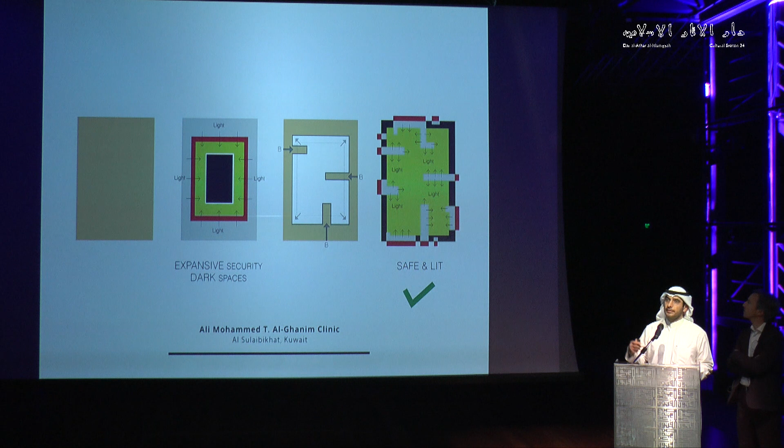In this particular project, situated in a so-called abandoned area in Sulaibikhat, we began to organize the clinic itself, which is a healthcare clinic, around Nur, around light. And we structured the spaces to circulate around the idea of how do you perceive light? How do you get closer to light? How do you begin to circulate towards the light?

As you begin to actually go around the clinic, what you begin to understand is the quality of light that you get through the various types of courtyards, and most importantly, how light itself and the different mechanisms of using light protect, but also signify the power of this healthcare institute within the site where it stands. Obviously, the issue of structuring light is very important, not only in this project, but we've begun to develop it as well in a different context.

And in this project, which we did a few years back, which is the last instance, a church in the outskirts of Seville, developed in a very impoverished area, where we had very limited resources in developing this project.

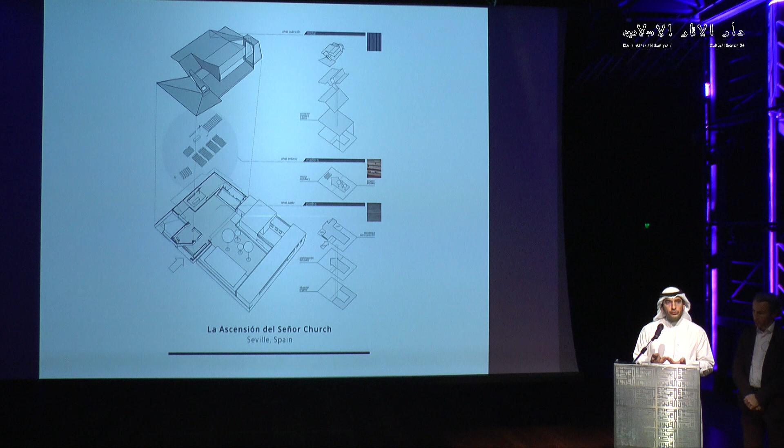There were two primary elements we looked at. One is the floor, which is like a carpet that began from the main entrance to welcome people through the project itself. The second, more important part, is actually the roof, which started to work as a means to focus light into the various areas within the church itself.

So we used Nur to structure the way people actually pray within this environment. Nur, for us, we have been playing with it to bring depth, to bring activity.

The Nirvana House is an extensive house structured through 7 courtyards, with a very extensive program but limited views into the sea, which is why the orientations were challenging. What we were confronting was the repetition of social spaces.

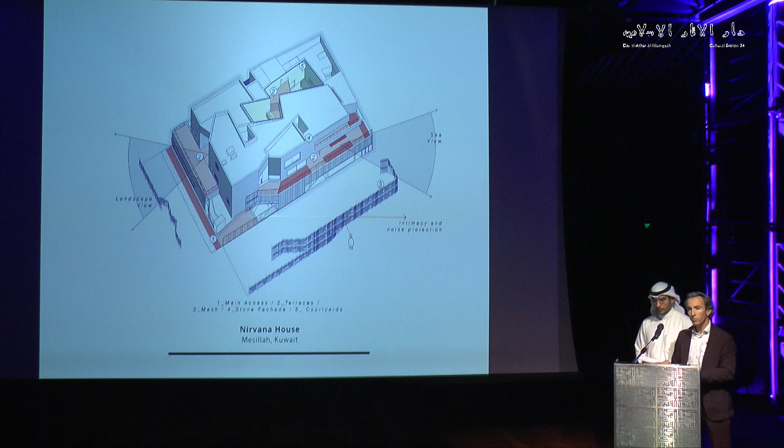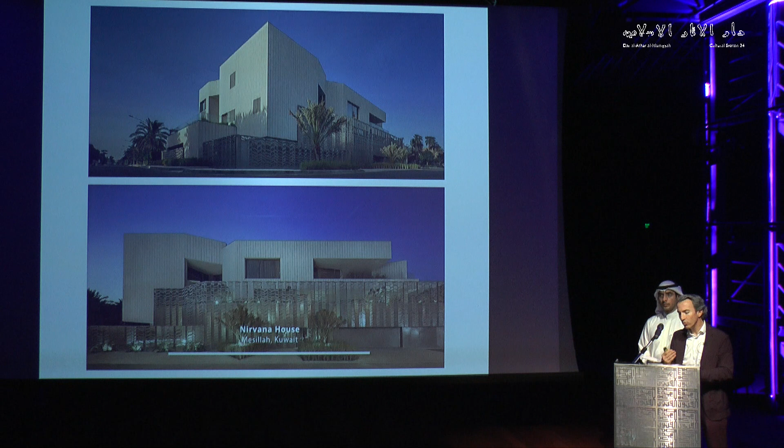And how to transform these spaces as we go, changing the materiality but also changing how you perceive the space. The space has to be read in a different way on a daily basis, but also in the way you move around. This also has a strong impact on the mashrabiya, this screen that we used.

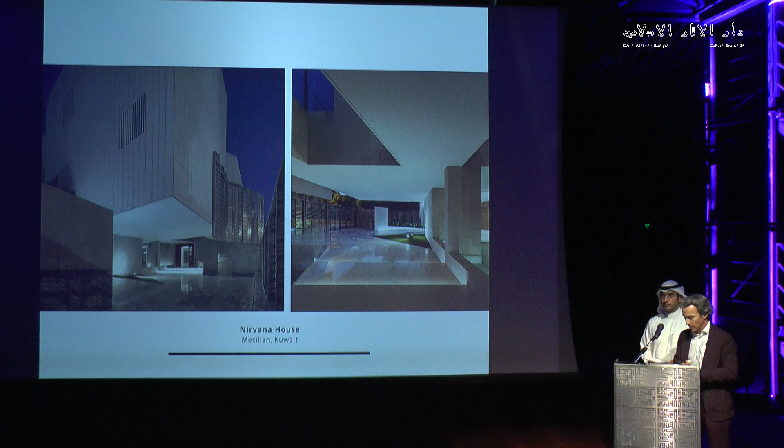You see the implication it has, how it changes completely how you could perceive the space. Instead of being a monotonous element, it becomes part of that reading, an extra reading - these layers of information that we are providing to the end user.

Also, for us, it was very important to break that relationship between interior and exterior and bring continuation between one space and the other. That reading, we could only manage to do through light, through Nur.

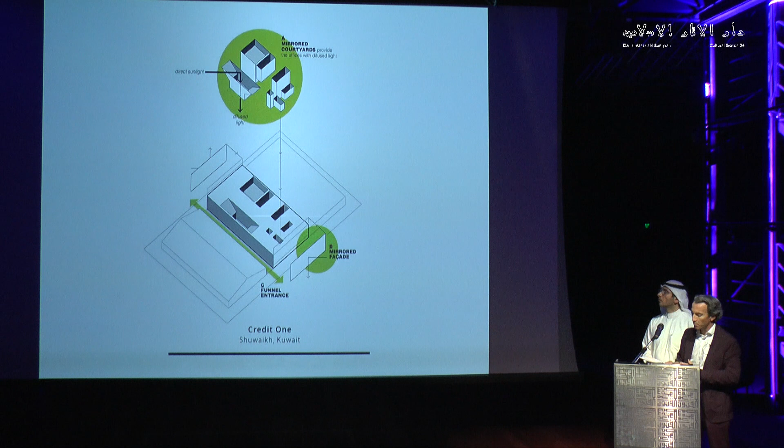Here's another example, completely different. This is Credit 1, an office for a car leasing company. In this case, we wanted to represent what the values of this company are. It's structured differently, in Shuwaikh, a very compact plot. We needed to bring some light into all the working spaces.

So we structured the project around six skylights. The issue here is we wanted to talk about cars, how that cinematographical experience when you are driving is represented on a static architectural element.

And this was why we introduced this blurry space, in a way that you don't really perceive what the space is, but you only feel - you have an experience of what is going on.

So there are small flashes of a sequence of things, and we considered that very important, to bring that aspect of what a car is.

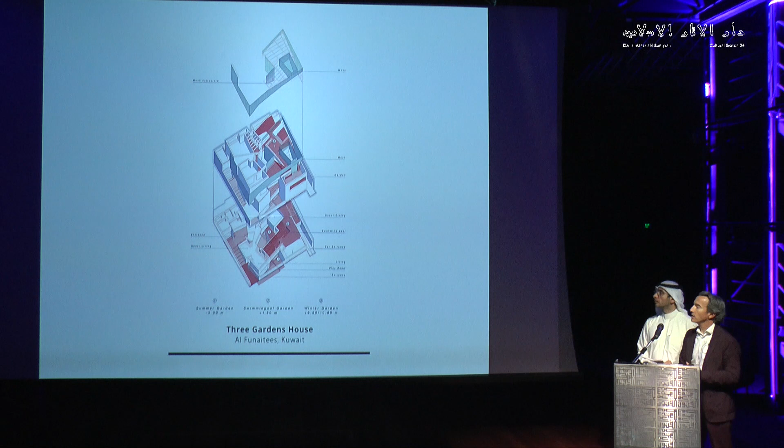Then we're going to introduce this other project, 3 Gardens. Again, not relevant programmatically what it is - it's a house where the clients wanted a huge garden space but with a huge program in the plot. This is common practice with many clients. So what we did is provide 3 gardens, 3 different gardens.

A summer garden, a winter garden, and what we call a water garden. Here you have that relationship - there are 2 courtyards that relate diagonally. But the water garden is what becomes the lantern of the project.

This goes back to what we spoke about before. The water itself - you see the kind of reflections it brings into the house, the type of life we wanted the client to experience - in a way that this is the core, the soul of the house. That garden becomes the core and the soul of the house.

The last example is what we call Secret House. The approach is completely different - you see how we manipulate this issue of Nur. This is why we said it has so many meanings, so many aspects that we could address with it. It's not only that - Nur is one of the aspects that falls into our practice, but for us, this is very relevant.

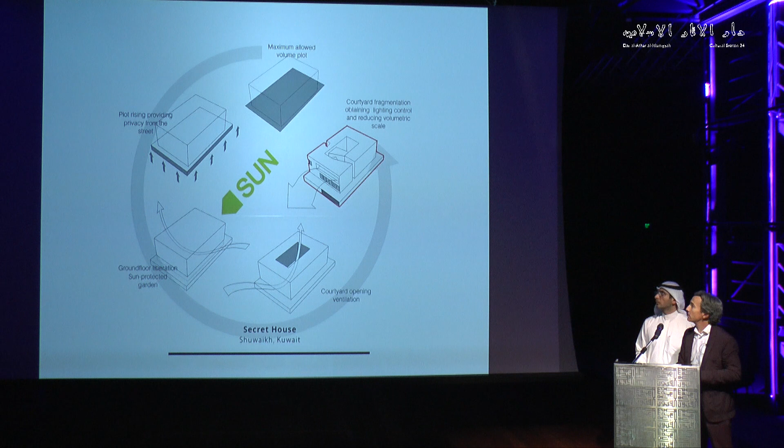In this case, what we call Secret House is for a family too. The house is structured around a single courtyard, but what is most important is that the courtyard is only perceived at ground level.

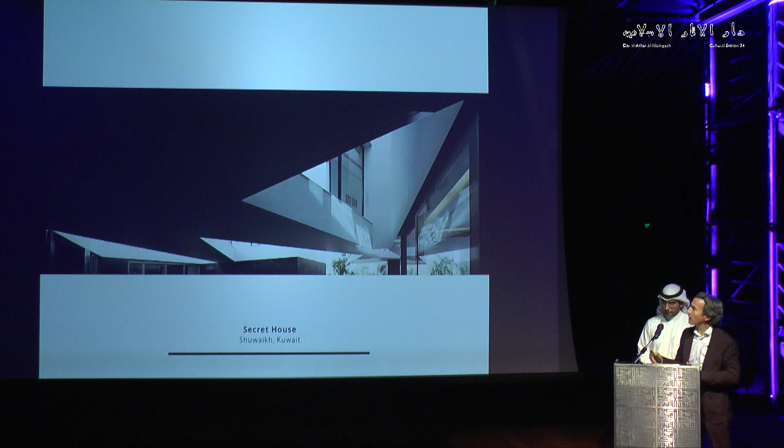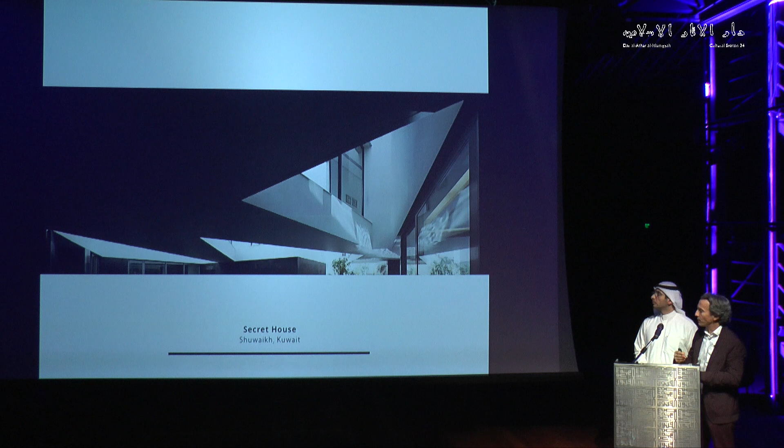This is an image of the ground level, and in it is this sequence of light and shadow that structured the levels of privacy that the client wanted. It's at ground floor, it's open, but at the same time identifies very clearly where you have to stand and how far you could go, whether as a guest or as a family member. It's very simple, there's no barriers. The barriers are psychological barriers, but they are very clear on the state of mind.

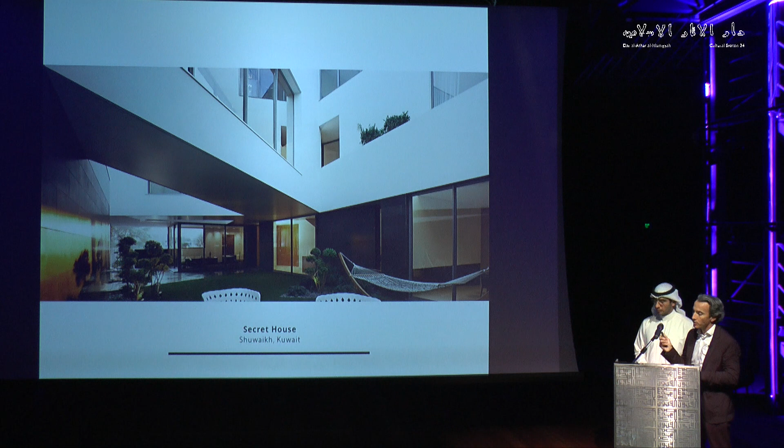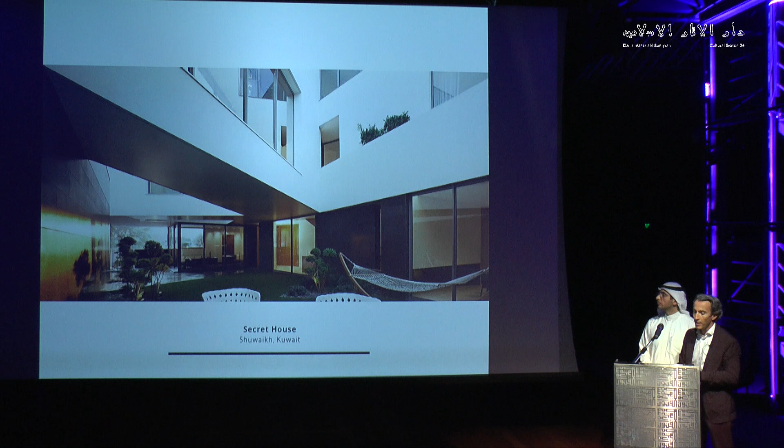On the upper floor, it's the opposite. There's full transparency in order that the family members interact between them, so the relationships change completely, and the way you approach light changes completely. From the outside you barely see anything, but the richness is inside, and this is why we call it the secret house - what we didn't want to show, but how you perceive it when you enter into it.

In the third chapter, we talk about light as a physical color, and its relationship to color being actually a cultural signifier, expressing certain codes within this society.

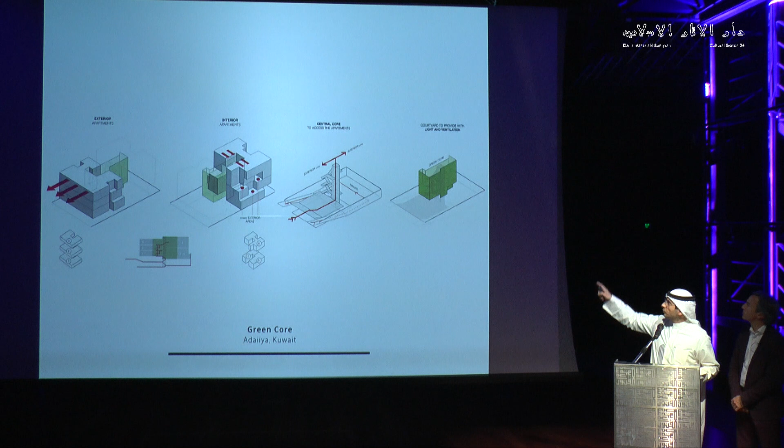We'll start with a project we called Green Core. It's actually a multi-family house on a single family plot. We developed for this client 6 apartments within a 1,000 square meter plot. What was very important about this project is how we could create as much privacy as possible for people circulating within the house as they explore it. Due to privacy reasons, we began to circulate around the central courtyard, which you begin to see here in green, and that central courtyard has the vertical elevators as well as the stairs.

Very importantly, we introduced what is why the project is called Green - a green mesh which allows us to borrow light from the central courtyard but gives maximum privacy for the users living within these 6 units. Of course, green is a color that represents in Islam nature and tranquility, and that's something quite relevant in a project similar to this.

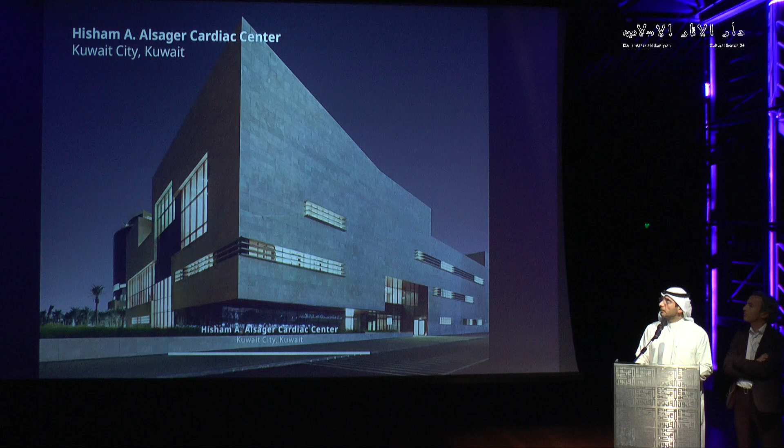On a different scale, and again a project here in Kuwait, this is a public project we developed called Mr. Hisham Alsager Cardiac Center. It's a cardiac hospital in the Sabah area. This project works quite interestingly for us because there are a lot of patients in Kuwait who have a continuous relationship with this building, visiting at least once every 3 months because of chronic disease here in Kuwait.

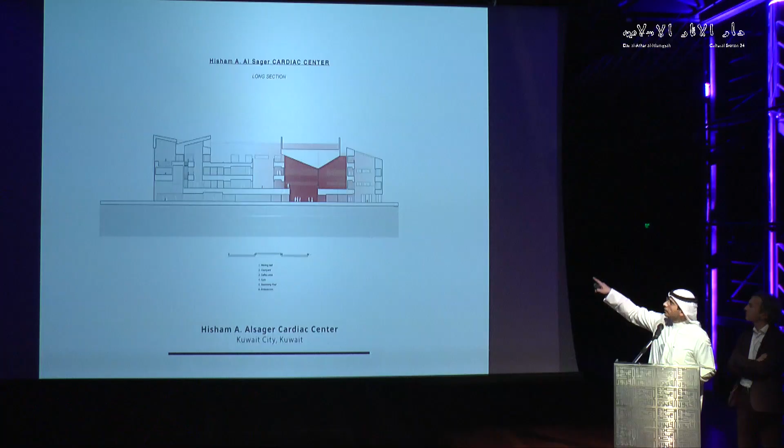So what we wanted to do is celebrate the social aspect that patients come and gather in this building so often. We tried to distinguish all the circulation spaces and the public areas using this red color.

From the outside, you begin to see the building itself, but you only approach the areas where the light comes through, and then you begin to explore the building through the light. What's very important is all the public areas have this color red, which represents and stimulates strength and power.

The circulation spaces that are for the doctors and for the healing spaces have different colors, which are more natural and more monotone.

We have seen how many meanings Nur could have had in the past, but in the future we don't know what's going on. We know there is a huge transformation in the virtual world. We think about how things will change, but still we don't know how we're going to perceive these spaces, or how we're going to be able to live with these spaces.

In this sense, just as we speak, we just launched a new project that we co-directed and co-produced in the urban space - a light festival in Spain. I'm going to show you a small video just for you to understand what we are talking about.